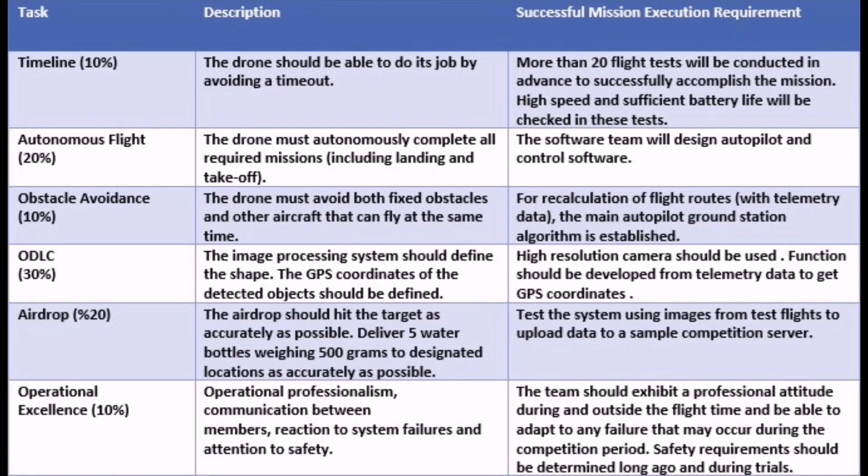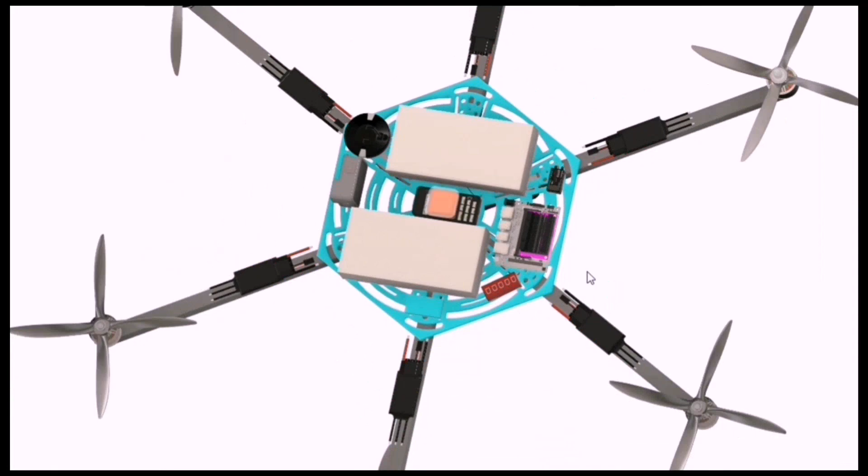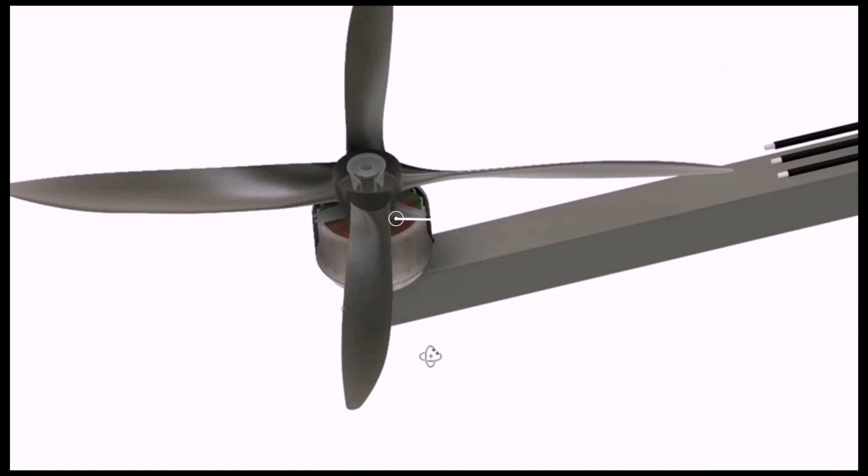This table shows us the missions, the descriptions of the missions and the acceptance criteria for a successful flight. The Pixhawk Orange Cube is used as a flight controller in our vehicle due to its ease of use and open source code. ESC with 8S Valor is used as speed controllers. The desired thrust is provided with the help of 6 propellers connected to the motors.

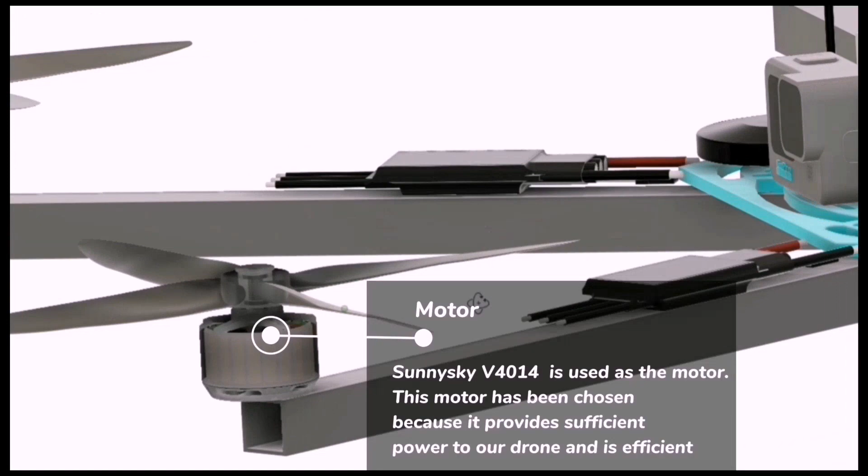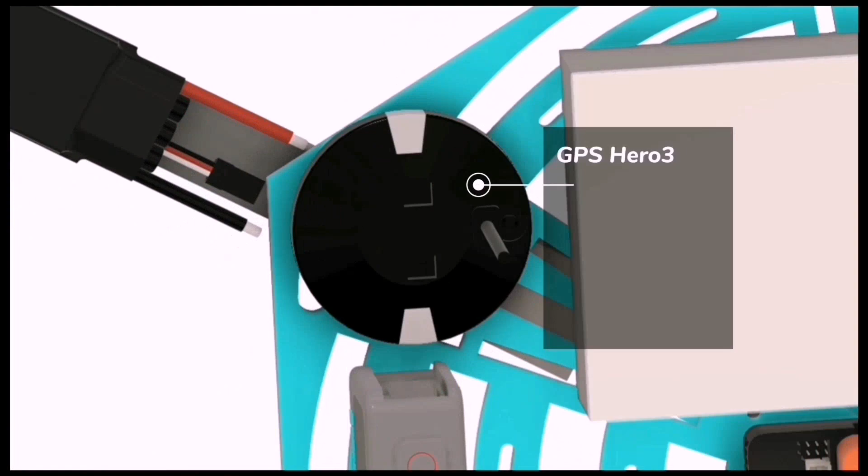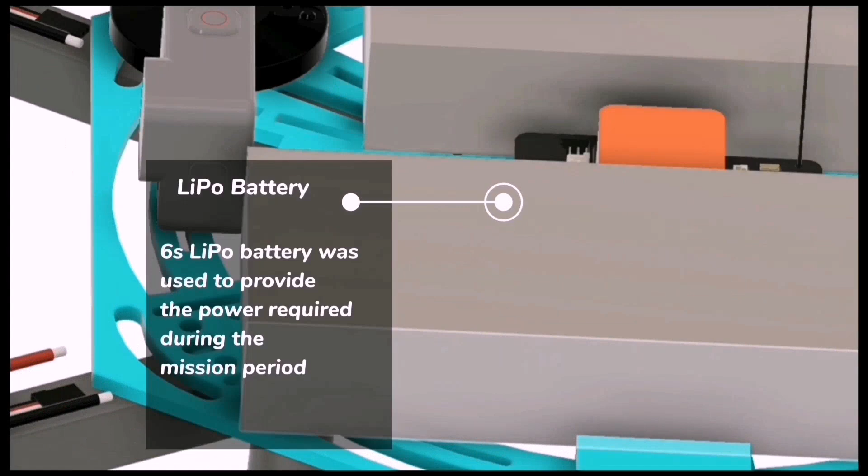Sunnysky V4014 is used as the motor. This motor has been chosen because it provides sufficient power to our drone and is efficient. Jetson Nano was used as the mission computer for image processing. The receiver communicates with the remote. A GPS module is used to track the drone instantly. A 6S LiPo battery was used to provide the power required during the mission period.

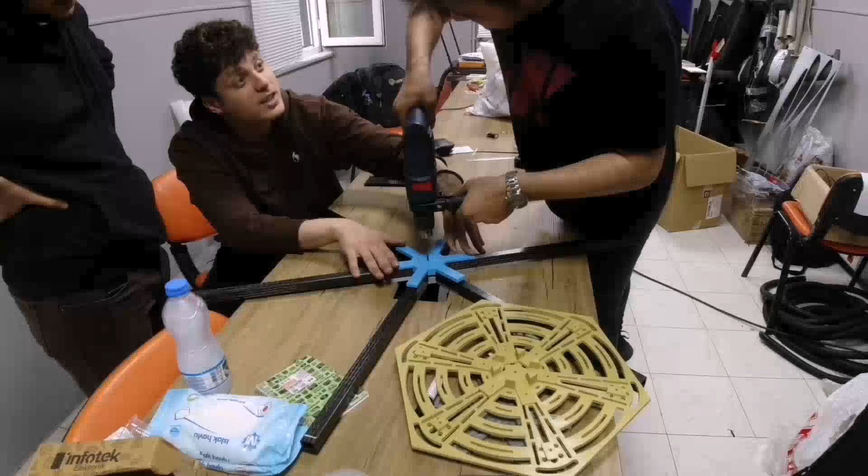Holybro telemetry was preferred for our vehicle to communicate with the ground controller and transfer instant data. The team decided to build a drone because of its payload capacity and fast completion of mission. This section shows the construction stages.

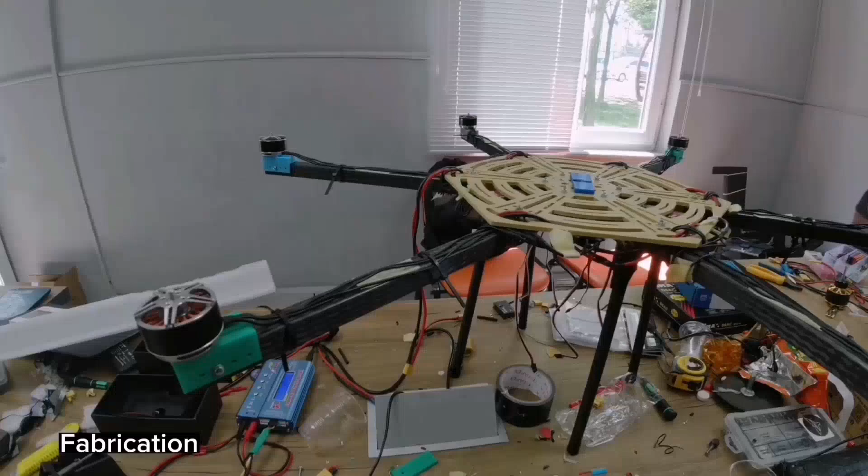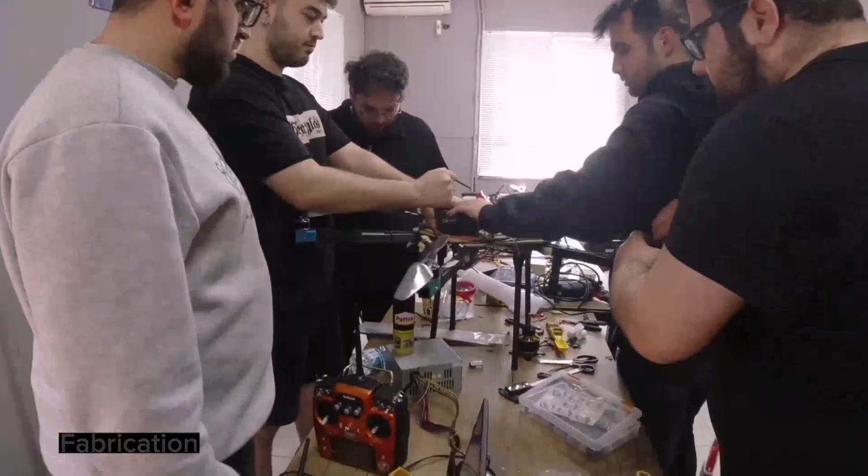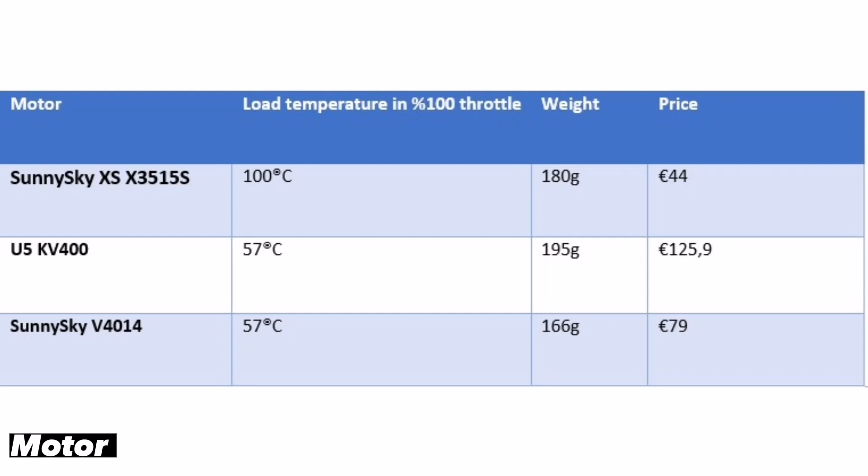Our team examined tricopter, quadcopter, hexacopter and multicopter during the literature phase. We decided on hexacopter, which has high stability and the ability to carry heavy loads. We chose carbon fiber pipe, with high strength, low weight and easy to process, for the arms carrying our motors, and cheap ply material for the body carrying our electronic components.

The ground control station is designed to perform manual operations, observe the data needed in the competition and transfer it to the server. Information such as drone location and number of satellites connected to GPS are on the interface in real time. Flight boundaries, markings, and drone position related to the flight area are displayed on the map in the interface.

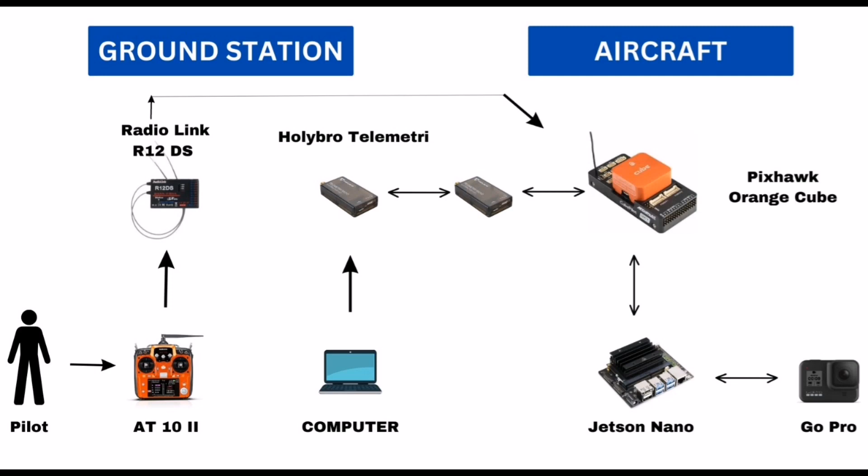According to the system design, the image and flight data on the drone must be transferred to the GCS in order to perform the tasks. It was decided to use the Holybro telemetry module in order not to interrupt the data transfer. RC receiver and transmitter will be used by the pilot to control the drone; the radio controller shown is preferred because it has a long range.

DroneKit has a Python library that allows MAVLink commands to be sent from the Jetson Nano drone computer to the Pixhawk Cube flight controller. But working with DroneKit is getting harder. The MAVROS package can be used to open the door to many other ROS tools and utilities in addition to getting the same functionality as DroneKit. Therefore, ROS will be used simultaneously with DroneKit.

This is our image detection code. There is a picture in our coding file. We detect the shapes, and we define objects with their shapes. There is a different object. We detected the whole objects with their shapes. The water bottles prepared for the task will be released to the determined targets thanks to the task mechanism working together with our image processing code.

Mission Planner will be used to run the autopilot, with our Pixhawk Orange Cube Flight Controller running ArduPilot. This allows the team to manually create the required waypoints for the autonomous operation of Arileria. The provision of various features like autonomous takeoff, waypoint navigation, autonomous landing, and a rich set of fail-safes proved to be fit to handle the SUAS mission.

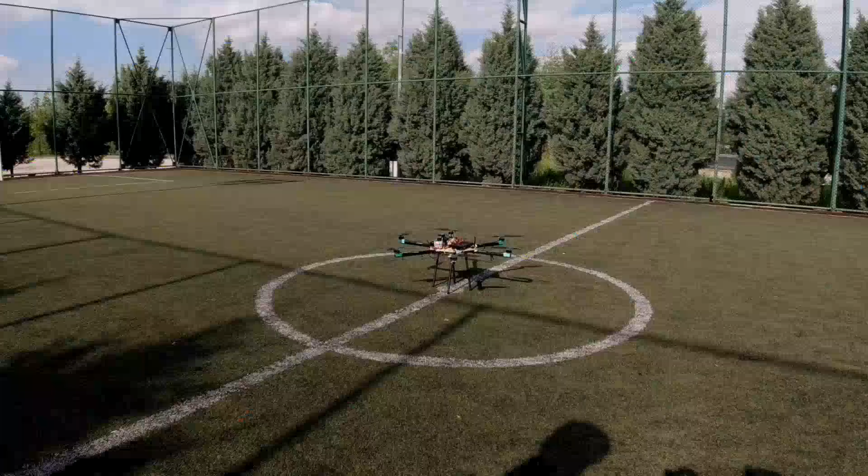Safety is always one of the important factors for aviation. Our main goal is to eliminate the security risk as much as possible. For this special purpose, all mitigations are taken into account and closely followed by each team member. Risk analyses are made in production, and efforts are made to prevent potential risks.